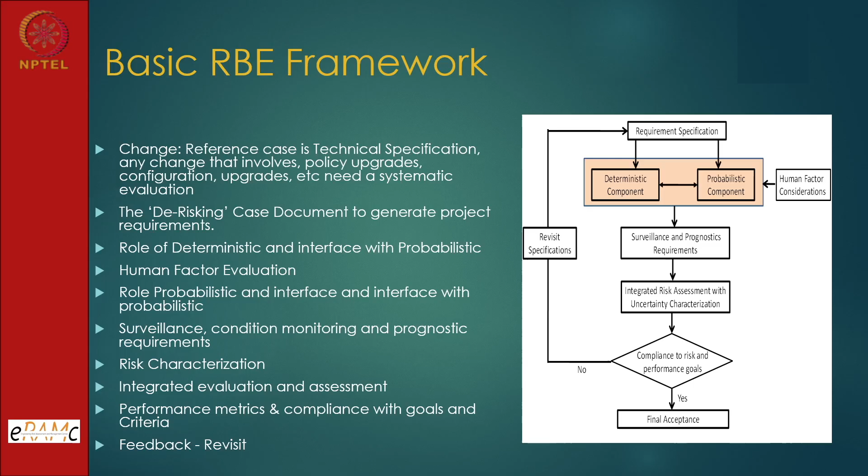And there is again one more requirement: for the change which has been implemented, feedback should be obtained over a period of 1 year or 2 years. This is a regular practice that one has to follow, to ensure there are no undue consequences from the change. So we saw the broad feature of the framework.

Now the most important thing is developing a definition and background of why we want to do this and what we want to achieve. So the operational systems can be divided into process systems and safety systems. These are the things we have been touching upon. It is just for the sake of change application that I am discussing. The process systems are required for continuous operation of the plant. The safety systems remain passive and in standby.

When a signal comes for their actuation, they will come into play, meet the safety function, and again go to the standby state. And since safety systems remain passive and in standby mode about 90% of the time, their testing is carried out periodically. It could be quarterly, biannually, or annually, but they should be tested. Why? Because the latent failures which manifest in the standby condition should be revealed and corrective action should be performed.

It could be a maintenance action, a policy related issue, or new changes that we do, but it should be brought to the state where latent failures are less. And even after doing that, there is something called operating experience. Now, based on operating experience regarding latent failures and the periodic testing, let us say we are doing quarterly testing for a system such as the emergency cooling system.

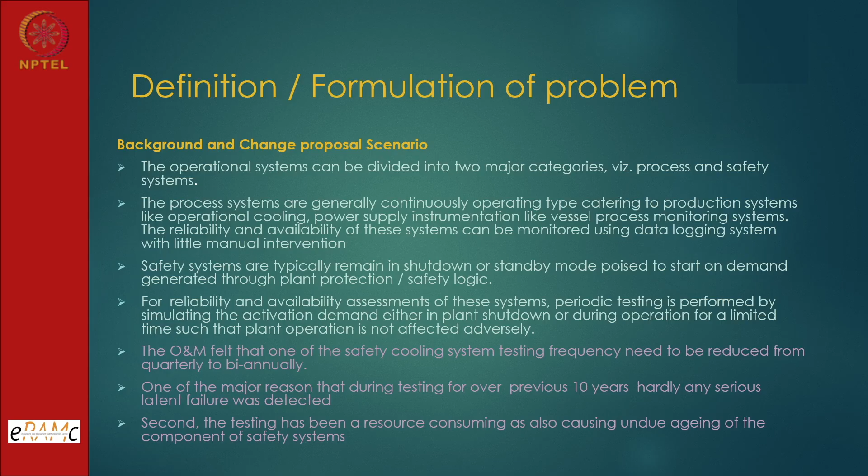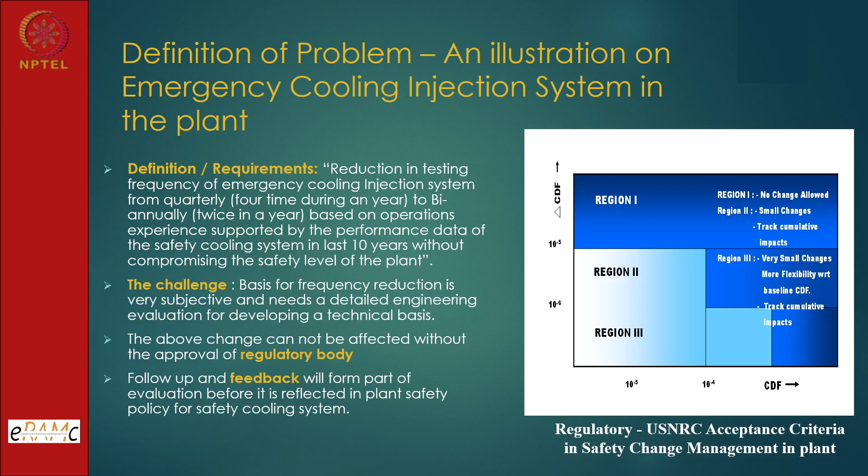And then, as I mentioned, we will try to discuss this particular subject with a simplified consideration and simplified schematics. So let us first try to understand the system. I have shown a very simplified view. This is a reactor, and this is an isolation valve between the reactor and the emergency coolant injection system, and when there is some rupture or loss of coolant in this system,

then, please see, I have not shown the complete recirculation system here, I have shown only the reactor. So there is a cooling loop. In that cooling loop, if there is a rupture, then this system should automatically get activated, and these two pumps should start injecting the coolant into the reactor, so that we do not have an accident situation.

Now, as we come to the subject, the objective is this particular emergency core cooling system. It is a standby system, a safety system, normally called an engineered safety feature. So in case of emergency, the cooling water from pump 1 and pump 2 is injected based on the requirement. We can operate one pump or both pumps.

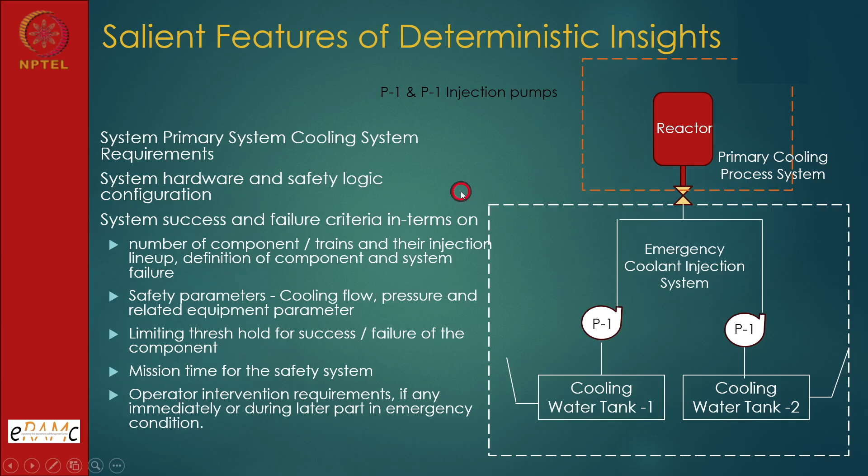So now we have a PRA model of the plant, and on that PRA model this change will be effected, and we will see whether any change is there, first at the safety system level, second at the plant level, and if it is there, how much. Then the case will be submitted to the regulator, and finally clearance will be obtained.

So, what are the deterministic steps involved? We discussed there are probabilistic steps and deterministic steps. Defense in depth should not be compromised, and identification of hazards, internal and external. Whatever changes are being done will be seen in the context of internal events and external events, and the event frequency will be propagated on the safety model of the plant, and the formulation of design basis.

It is required that it does not cause a violation of safety limits and design basis. Identification of safety functions is very important: when we make any change, what are the safety functions? Here in this slide we have become a little generic, because we are discussing only the deterministic part. Deterministic safety analysis involves thermal hydraulic analysis, structural analysis, hazard analysis, and formulation of safety acceptance criteria.

It could be in terms of flow, it could be in terms of pressure, it could be in terms of thickness, or any physical parameter. So, those criteria have to be understood. Development of plant technical specification.

So, the plant technical specification is a document which is derived from the safety document of the plant, and here there are stipulations in terms of surveillance, in terms of maintenance, in terms of manpower, in terms of safety limit, that is threshold limits for safety, and then limiting condition for operations, and so many things. So, this should not be violated.

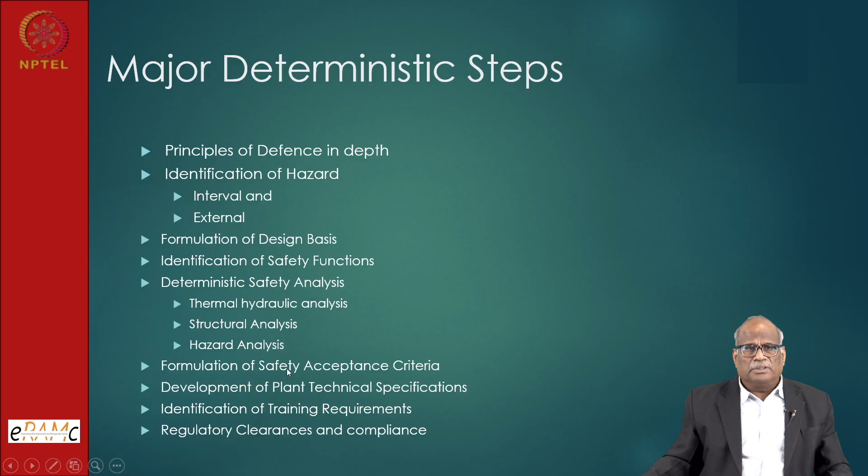So, this document should be available, and when we talk about change, we are talking about change in respect of technical specification. So, if you want to change the technical specification, that is from quarterly to 6 monthly, we have to demonstrate a case systematically. Identification of training requirements, regulatory clearance and compliance. These are the part of deterministic component in a plant system.

Then probabilistic risk analysis. Because we have been discussing deterministic and probabilistic, I am not going into the details of it, but there is a separate lecture on deterministic and probabilistic where we will go into the detail. Now, in the framework I am avoiding those detailed or lengthy discussions.

So, probabilistic risk analysis: if a plant has an intention to do a PRA analysis, a policy document should be there on why it should be done, because PRA modeling is a very expensive proposition, and there should be justification, because manpower, resources, facilities, software, models, methods, experimental facilities are required to support a PRA development program.

Then the most important step is identification of initiating events, and particularly this step will enable you to write a project report, giving all the justification, details, depth, scope of the document, objective of the document, and then we will have a list of initiating events, and these initiating events form part of the deterministic approach also.

So, a ready-made set will be available, but we will have to have our own master logic diagram, learning from other plants, and then we have to update the initiating event list as part of the probabilistic risk analysis, and then the safety system modeling has to be done. We have seen many fault trees, how they are drawn, and then finally development of accident sequences and identification of human interactions, because we are talking about the risk conscious operation management ecosystem.

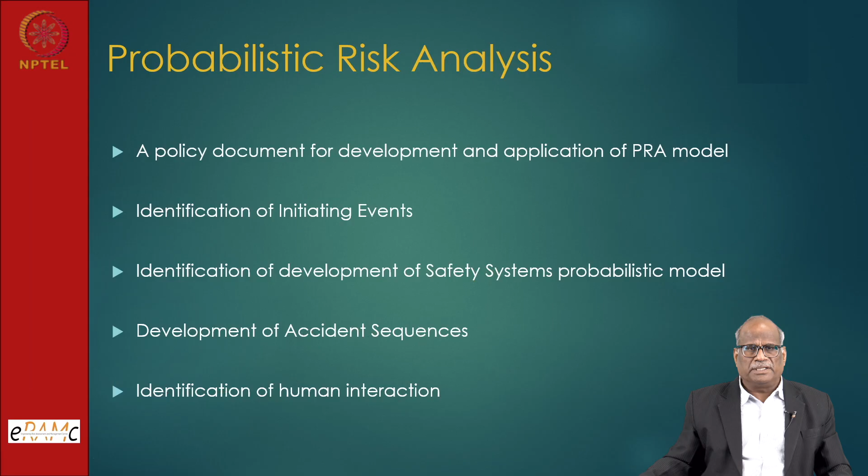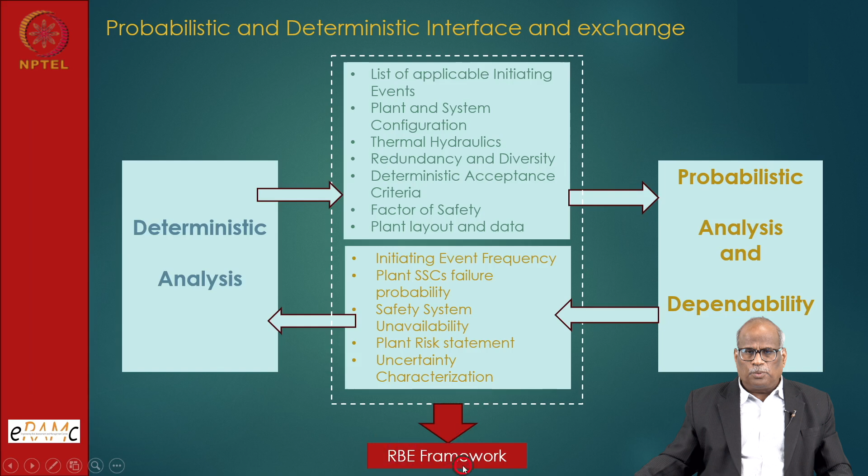Plant risk statement, uncertainty characterization. So these are the inputs, and what we have as net output is the risk based engineering framework. Okay.

We discussed the requirements and salient features of risk based engineering through the flow chart that formed part of this lecture. It is not IRBE, it is risk based engineering, because when this methodology was being developed, it was given the name integrated risk based engineering. Now it is only risk based engineering, and that's the title of my book.

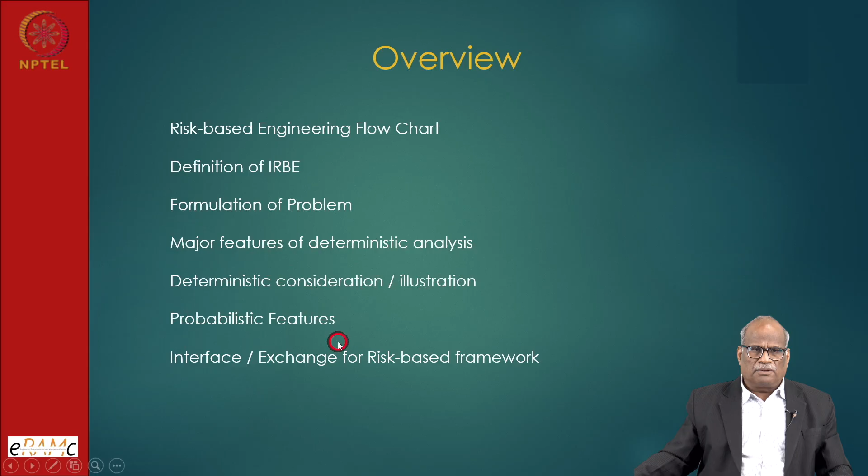Formulation of problem. We have seen how much effort goes into the formulation of the problem, what you want to do, major features of deterministic considerations through illustration, probabilistic features also included, and we saw the interface exchange in the risk based framework between deterministic and probabilistic, how it happens.